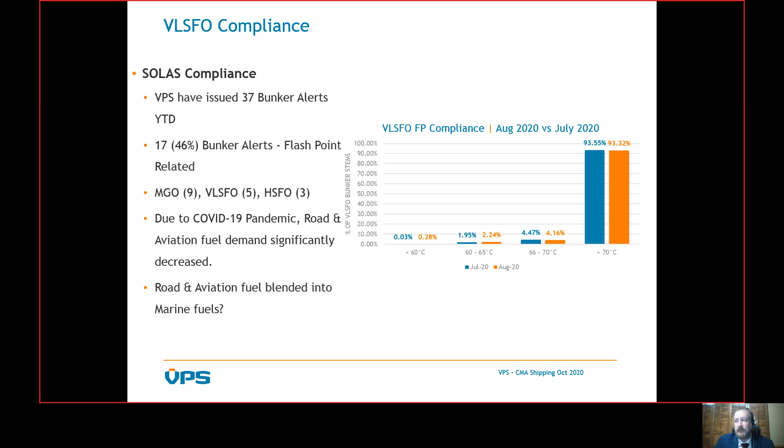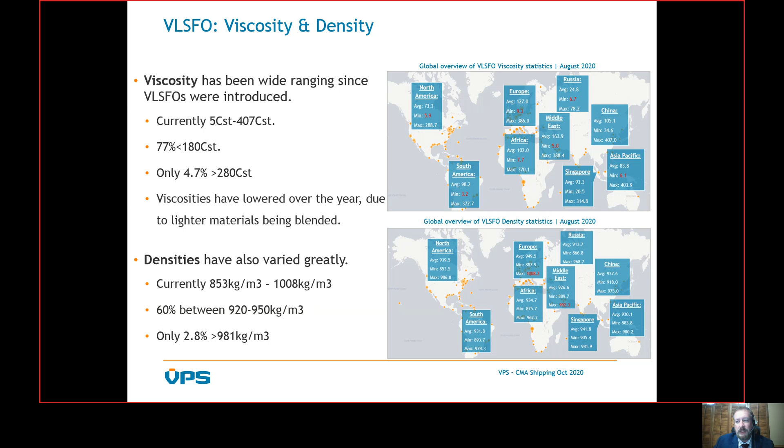Similarly, on densities, we also see a great variety and a wide range of densities across the globe. Currently, we're seeing a range of 853 up to 1008 kilograms per cubic meter. 60% of these lie in the range of 920 to 950, so quite a bit lower than what chief engineers were accustomed to a year ago of 991, 990. Only 2.8% of the VLSFOs were above 981.

Well, there is some good news on the cat fines, alumina silica. Cat fines have improved significantly during the year 2020. In January, 22% of samples were above 40 ppm. And as of August, only 9.6% were above 40 ppm. So we are seeing a downward trend in cat fine content, which is good for ship owners.

But of course, there's still a wide range. The current minimum that we see across the globe is 2 parts per million, extremely low. Current maximum, 313 parts per million, which is catastrophically high for a marine diesel engine. The global average sits at 14.9 parts per million, which is quite low. The improvement in these cat fine levels is primarily due to lower levels of residual component being blended into VLSFO.

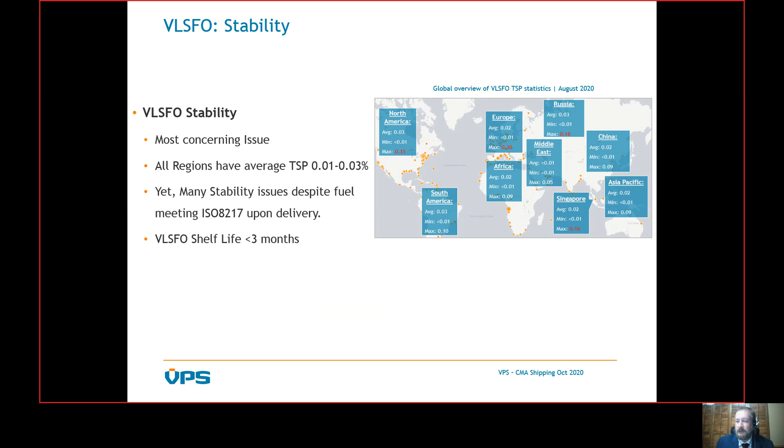Cold flow properties is somewhat of a new issue on black oils. VPS has developed a wax appearance test, which is somewhat similar to cloud point for distillates. And we have applied that to VLSFOs across the world. What we found is that 99% of VLSFOs have a pour point less than 30 centigrade, the ISO limit. So that is good. What we did find is that wax appearance temperature is on average 24 degrees centigrade higher than pour point. So quite a wide range from pour point to wax appearance. 78% of these fuels have a wax appearance temperature greater than 30 centigrade.

WDT is the wax disappearance temperature. So once wax has formed in your fuel, you'll need to heat it to the wax disappearance temperature in order to reliquefy it and use it suitably in the transfer system. So what we found on wax disappearance is that on average it's 10 degrees centigrade higher than the wax appearance temperature. So if these fuels drop in temperature, you'll need to heat them quite a bit to reliquefy them. 77% of VLSFOs have a wax appearance temperature above 40 degrees centigrade, which is quite elevated. And VLSFO storage temperatures are key to avoiding some operational problems.

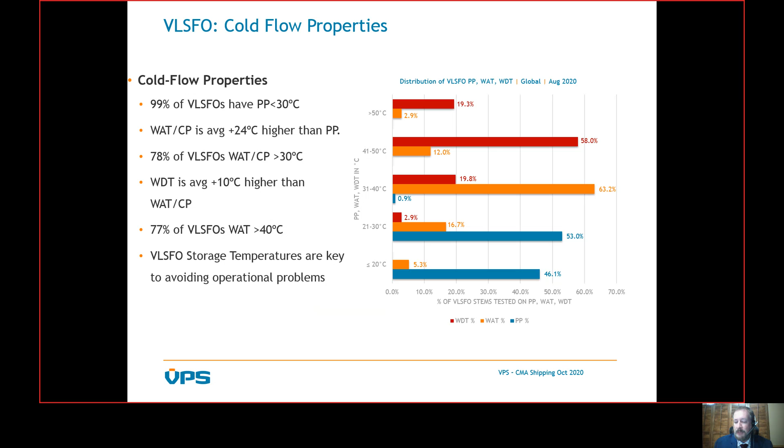So just to illustrate a couple of the situations we've seen and some of the advice we're giving to our customers in this area, we find some VLSFOs with high total sediment and at the same time high wax appearance temperatures. So heating these fuels above the WAT to prevent cold flow issues can also cause the sediment to rise. When the fuel is eventually burned, the sediment could be off-spec and thick sludge formed. Typically, this fuel forms sludge at the purifiers, and increasing the temperature has generally worsened the situation. The recommendation we're giving here is that we limit VLSFO bunker storage time to 2 months or less.

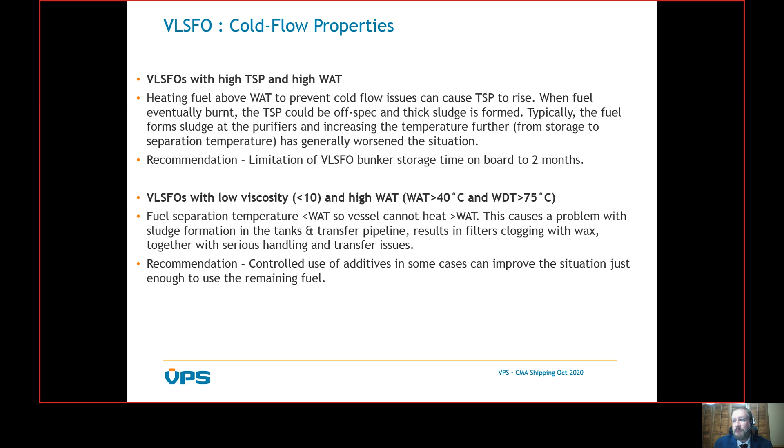Another situation we see are VLSFOs with low viscosity, and what I mean by that is less than 10 centistoke, and at the same time, high wax appearance temperature above 40 degrees centigrade. So fuel separation temperature is below the WAT temperature, so the vessel cannot heat above the wax appearance temperature. This can cause a problem with sludge formation in the tanks and transfer pipelines, resulting in filters clogging with wax, together with handling issues and transfer issues. So in this case, there can be some controlled use of additives in certain cases, which could improve the situation enough to use the remaining fuel.

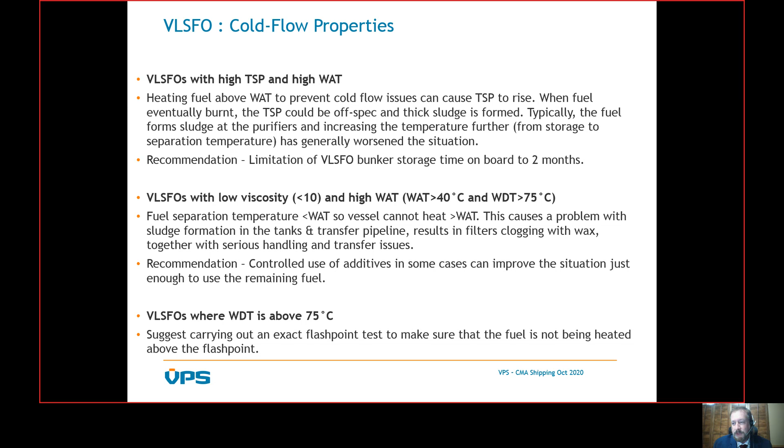The last situation I'll mention is VLSFOs where the wax disappearance temperature is above 75 degrees centigrade, which is a very elevated temperature. In this case, we need to be very mindful of the flash point. So we would suggest carrying out an exact flash point test in order to make sure that the fuel is not being heated above that flash point temperature.

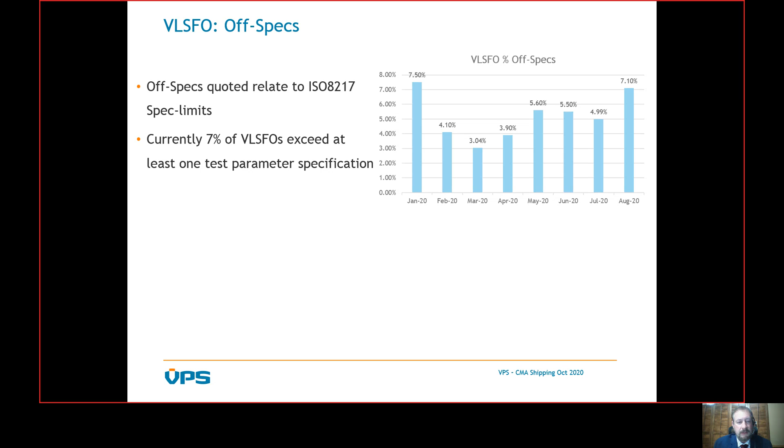Now, on the issue of off-spec rate, off-specs quoted here relate to ISO 8217 specification limits. Currently, we're seeing 7% of VLSFOs exceed at least one test parameter spec. So when you compare that to high sulfur fuels from a year ago, high sulfur fuel typically had an off-spec rate of anywhere from 10 to 13%. So at 7%, VLSFO off-spec rate is already better than high sulfur fuels. Sulfur accounts for almost half the off-specs, so that is the thing to look for. Europe currently has the highest level of off-spec VLSFOs at 17%, mostly due to sulfur. Singapore currently at 4.2%, mainly flashpoint.

Another phenomenon that VPS encountered was in the first quarter of this year. We witnessed over 40 vessels that had broken piston rings, damaged cylinder liners, and hard deposits on their pistons. We conducted an investigation, and in May of this year, we published a white paper on our findings. What we found is that all of these vessels were burning on-spec VLSFO. Keyword there is on-spec. All of these vessels were using lubricating oil with a base number of 40. Two-stroke engines seem to be the most susceptible to this condition.

Numerous fuel and lubricant suppliers were involved, various engine manufacturers, so it was not limited to any particular fuel, lube oil, or engine. And what we found was that the cause was that the reserve base number of the cylinder oil was not being utilized to neutralize acids from fuel combustion due to lower sulfur. The result is that they got hard calcium deposits on the piston crown, causing liner wear, scuffing, and broken piston rings. When the base number is reduced, detergency reduces, and the oil film is lost. When the base number is increased, detergency improves, the oil film is retained, but deposit formation would start.

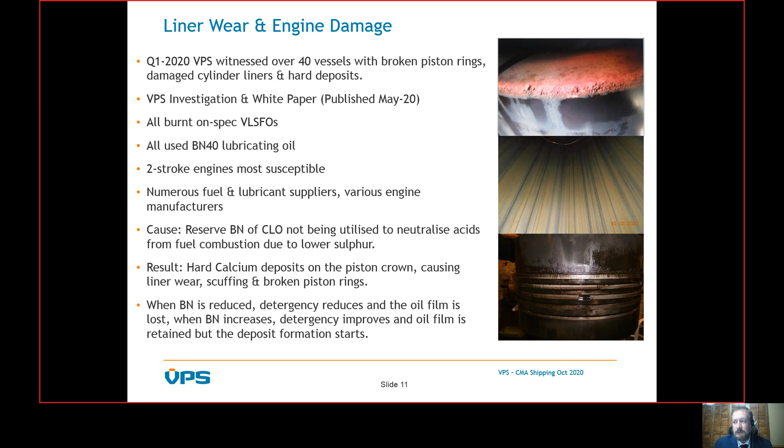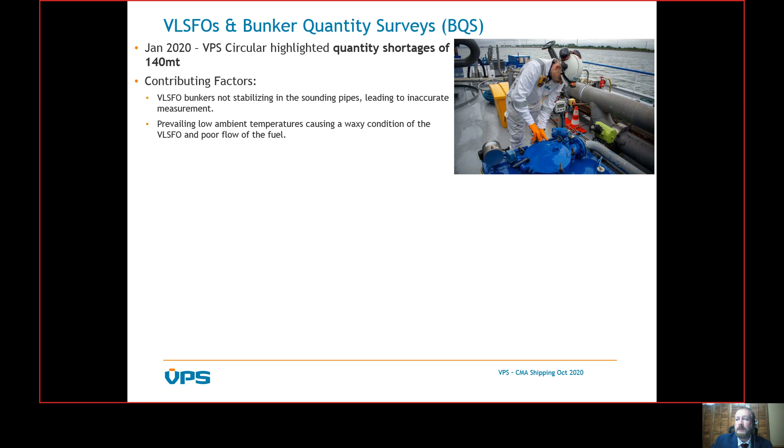So lastly, I'll touch on bunker quantity survey and how VLSFO has impacted bunker quantity surveys. So in January of 2020, we published a circular that highlighted a quantity shortage of 140 metric tons, quite a significant amount. The contributing factors here were that the VLSFO was not stabilizing in the sounding tubes, leading to inaccurate measurements. Prevailing low ambient temperatures were causing a waxy condition of the fuel and poor flow of the fuel. The chief engineer issued a note of protest to the supplier.

So it's therefore very important to engage a professional bunker surveyor in order for the parties concerned to know the following: precautions taken during bunkering to detect these types of losses, independent assessment of the situation and notification of the issues on site, the final quantity difference encountered and the possible reasons. And something that an old boss of mine was a stickler for was documentation. If you don't have documentation of something, then it never really happened. So documentation of the action taken and photos are definitely very helpful, something that VPS surveyors will do during any BQS. Follow-up actions at the next port, assessment of completed investigation, and provision of a conclusion on the quantity difference. And of course, as always, it's important to follow correct sampling procedures to make sure you've obtained a representative sample.

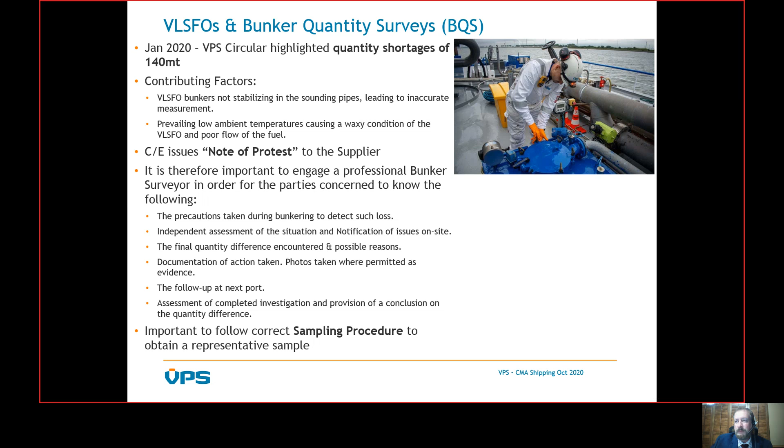So in summary, VLSFO is the most popular bunker fuel of choice. It has wide geographical availability. We have seen a 43% increase in demand for high sulfur fuel oil over the last 6 months, so scrubber usage is on the rise. There was no real increase in the demand for marine gas oil, as many speculated last year. VLSFO sulfur compliance has varied from 1% to 6% off specs. COVID-19 has had its impact and could be a potential explanation for the rise in flashpoint issues.

Densities and viscosities on these fuels continue to vary quite a bit, so chief engineers need to read their fuel reports, be aware of the viscosities, densities, storage temperature, transfer temperature. Cold flow issues are common now, and they can impact your vessel operations. VLSFO and lube oil behavior do require close monitoring to avoid cylinder liner damage. And numerous factors during 2020 resulted in the need for an increased focus on fuel management.